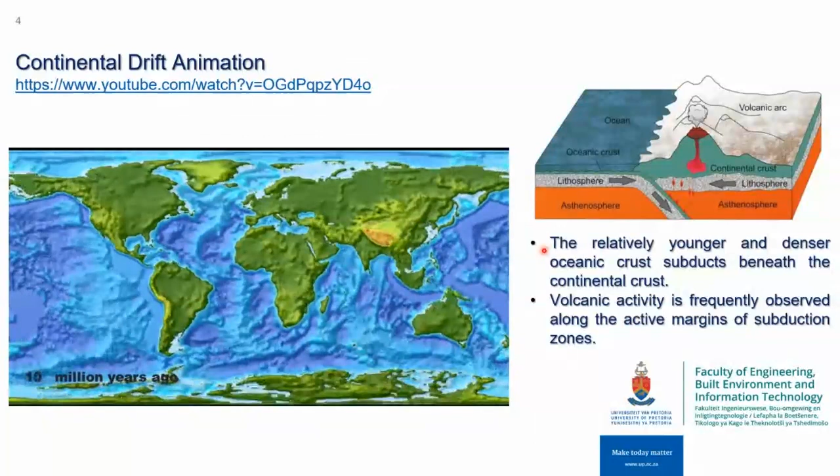So what are earthquakes and how do they occur? These are the major layers of the Earth. We have the lithosphere, composed of the crust and the upper solid mantle, and below that the mantle is very soft and has a relative motion, which causes the plates to deform, causing continental drift. As you can see in the animation, 200 million years ago Pangaea, a single continent, formed into the modern map. The interaction between these continents and tectonic plates causes earthquakes, and the movement of the tectonic plates increases the stresses at the boundaries. When these stresses reach a specific limit, we have the rupture.

The rupture at the focus causes an entire surface to move, generating P and S waves. This is how earthquake waves are generated and they reach us, so we feel the vibration and movement of the ground. The P waves reach us first, the S waves come later, and mainly these waves are the ones measured by accelerometers.

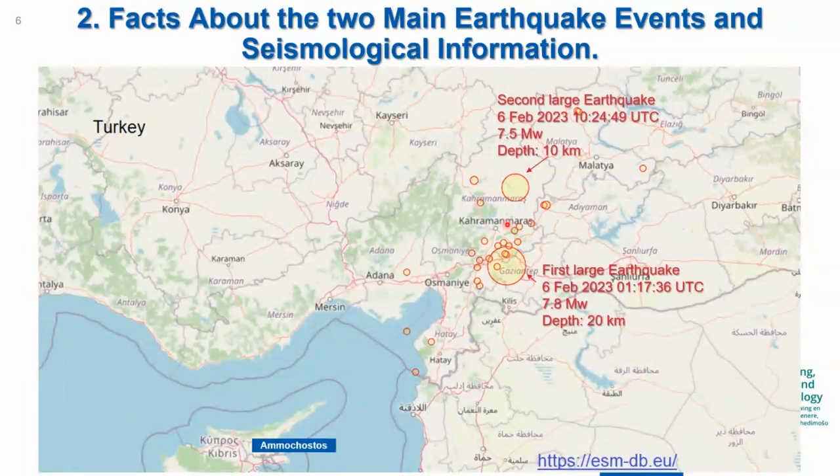Now, on the 6th of February 2023, in the morning at 17 minutes past 1, a 7.8 moment magnitude earthquake occurred in the region between Kahramanmaraş and Gaziantep. Nine hours later, another earthquake of 7.5 moment magnitude occurred in the region north of Kahramanmaraş. These events caused more than 3,500 aftershocks. This figure shows the epicenters of earthquakes larger than 4.5 moment magnitude.

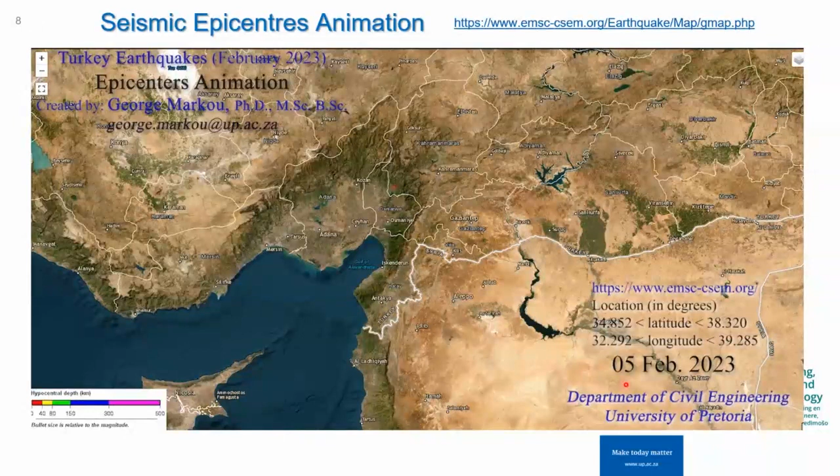As you will see in this video I created for this presentation, using EMSC website data, it shows the epicenters from the 5th of February until the 28th of February. The red dots show the 6th of February, 7th of February, and so on. More than 3,500 earthquakes occurred due to this phenomenon.

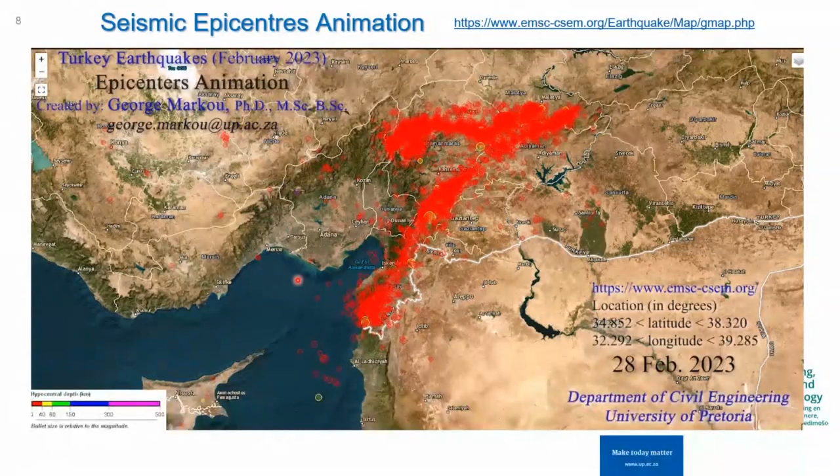Cyprus is nearby, and on the west side is Greece, countries that are extremely concerned with what happened. The seismic activity in these regions also activates other faults in the southern and western area, like in 1999, when we had an earthquake that also caused earthquakes in Cyprus and Greece.

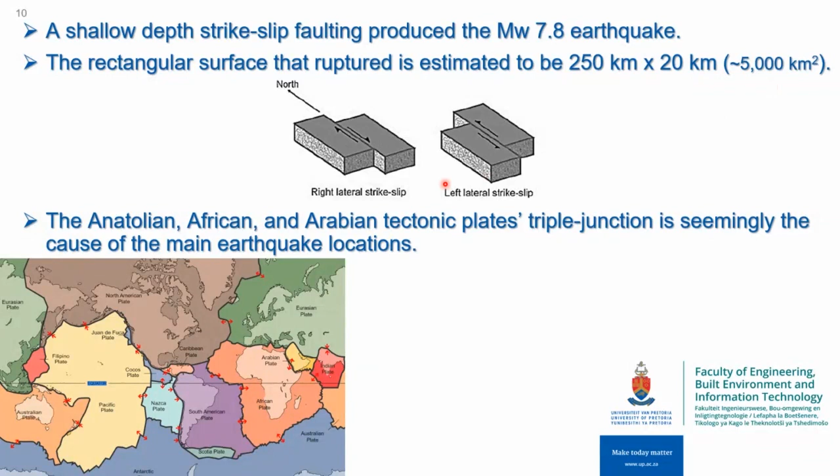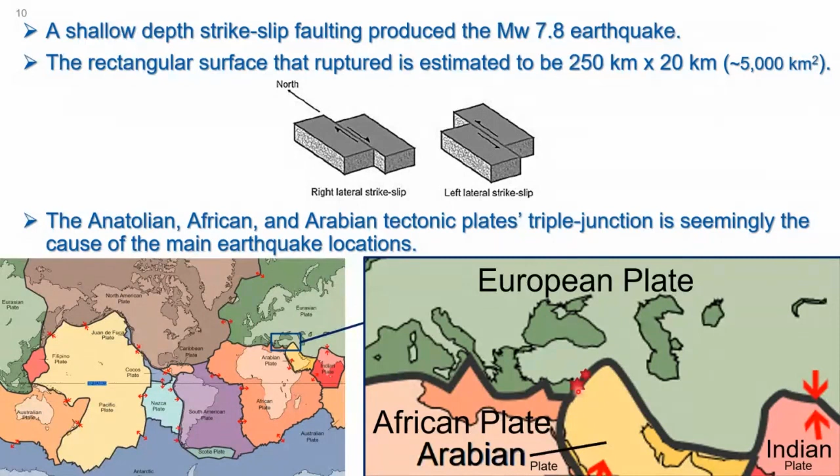In this case, we have the intercontinental plates, and this is where the earthquake occurred. It was a shallow depth strike slip faulting that produced a 7.8 moment magnitude, and the second one was 7.5, plus several 6 and 5 moment magnitude earthquakes. An estimation of 250 kilometers by 20 kilometers depth was the rectangular surface of the ruptured fault, around 5,000 square kilometers. This is attributed to the triple junction of the Anatolian, African, and Arabian tectonic plates. This is the eastern Anatolian fault, and this is where the two main events occurred.

Now, the accelerograms, and in this case the components of the accelerograms that I used, I got them from the Engineering Strong Motion database, from the station KHMN, which was located 25.5 kilometers from the epicenter. And of course, the epicenter is shown here again.

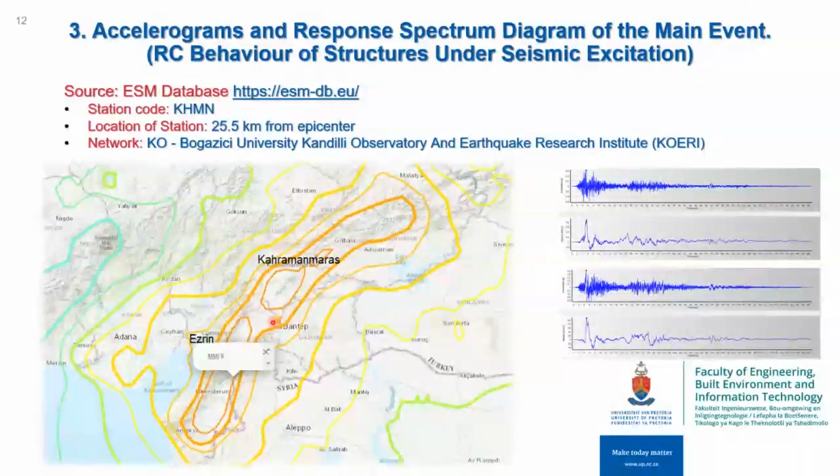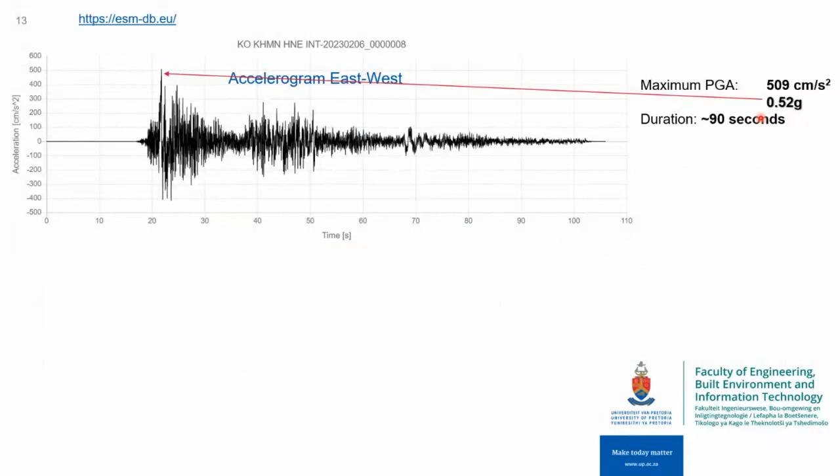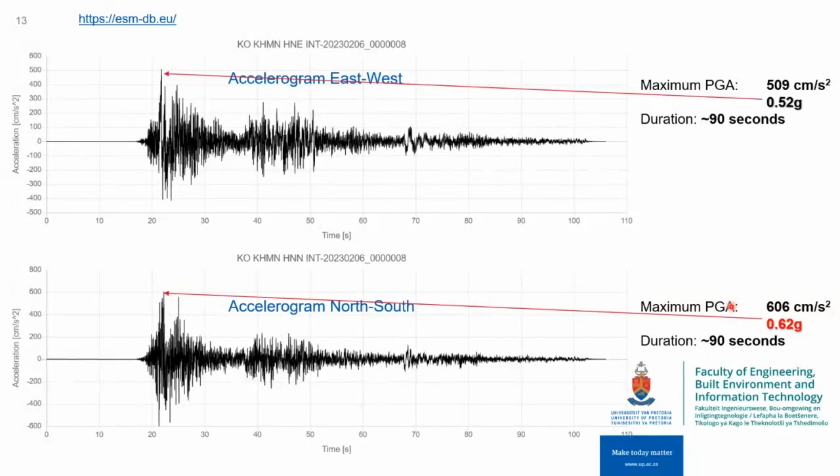The east-west accelerogram derives a maximum acceleration, peak ground acceleration, of 0.52 g, and the north-south component is 0.62 g. For those experienced with earthquake-resistant design, they know that our maximum peak ground acceleration here in South Africa and Pretoria is 0.2, and in Cyprus, which is an actively seismically active country, it's 0.25. So these are really large magnitudes, and the Z component also was very large, reaching almost 0.5 g.

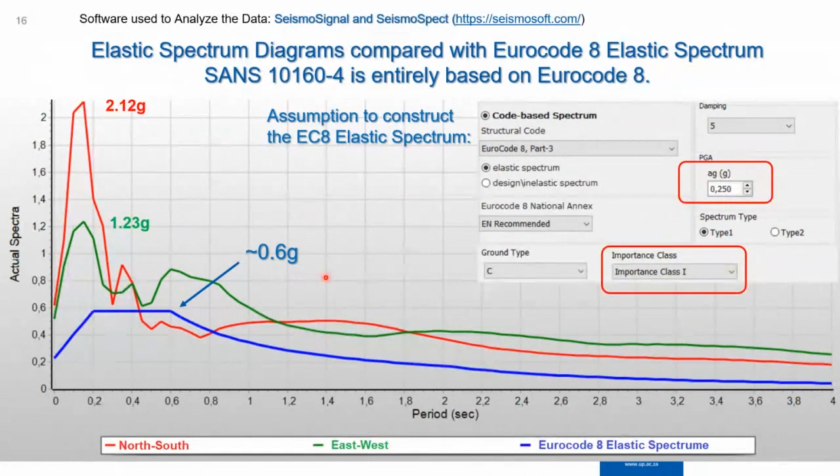Now, if you want to see where Eurocode 8 is located, I use 0.25 g as the peak ground acceleration, importance class 1, which are buildings of minor importance, and the ground type was C. This led to a maximum of 0.6 g in the elastic spectrum again. And if, let's say, we go to importance class 4, which are hospitals, fire stations, power plants, we can reach up to 1 g, again in the elastic spectrum diagram.

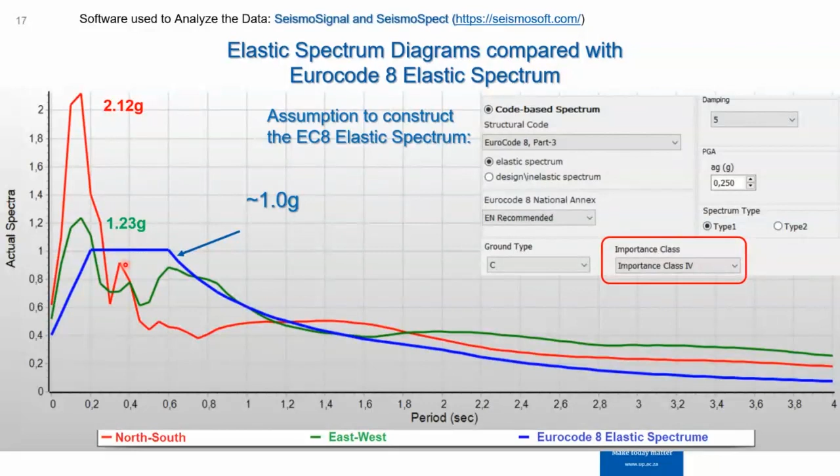What is the actual strength? Because we have all those safety factors integrated there. So back in the time, after I finished developing the first phase of ReConAn FEA, I said, all right, let us check what the Eurocode will provide to us.

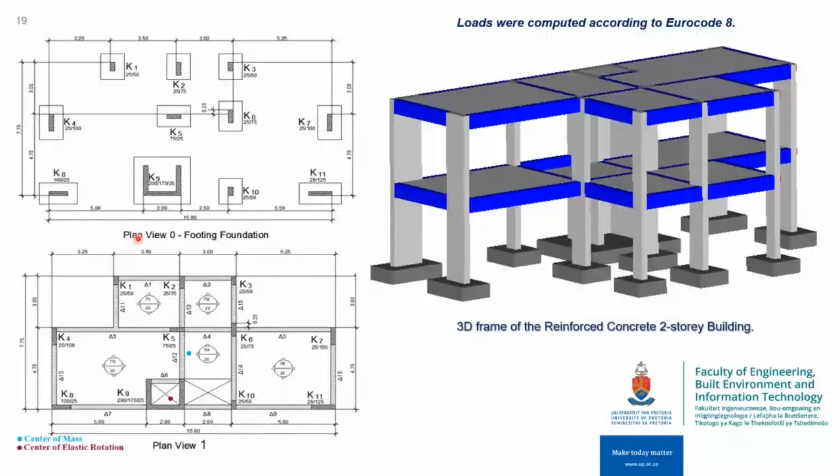So I designed a random structure, a 2-story reinforced concrete structure, which I used to design, as you can see here, this is a 3D frame as it was developed in the finite element analysis software. And then I used the geometry and Eurocode 8 in order to calculate the reinforcement using a commercial software.

So these are the reinforcements for the columns and the beams. They had stirrups 8 millimeter every 10 cm, and the longitudinal reinforcement were practically 2 to 3 bars, 14 milli in diameter, top and bottom. Some of them had 16 milli.

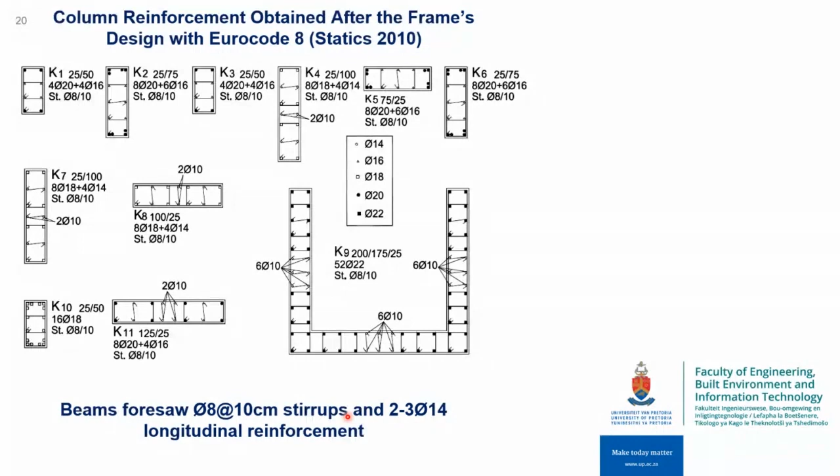So I created a 3D detail model, as you can see here in ReConAn FEA, with hexahedral elements to discretize the domain of concrete, and embedded rebar elements in order to discretize and model each and every rebar according to the design that derived from Eurocode 8.

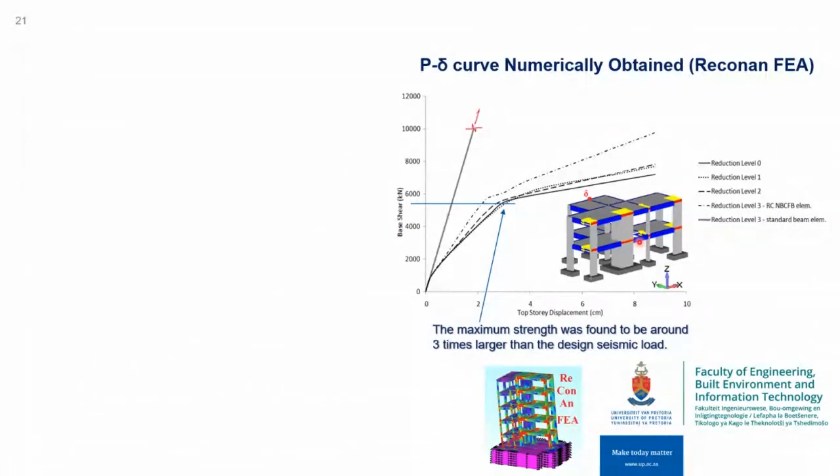I performed a pushover analysis, and what I discovered was that the actual load that I needed to apply in order to make this structure fail was 3 times larger than the actual design. So practically, between 2.5 and 3 times is the over-design that we get in the final product, if we assume that this is the earthquake that we expect to get.

So this shed a lot of light on why structures don't fail. They do develop damages, but they don't fail if we have very large earthquakes.

And of course, one of the main goals, as you can see, this is a model that I've developed of the Burj Khalifa, is to be able to perform full nonlinear dynamic analysis of structures like that in order to evaluate them. This model has more than 14 million hexahedral elements and more than 22 million nodes. And of course, this does not include piles and soil domain.

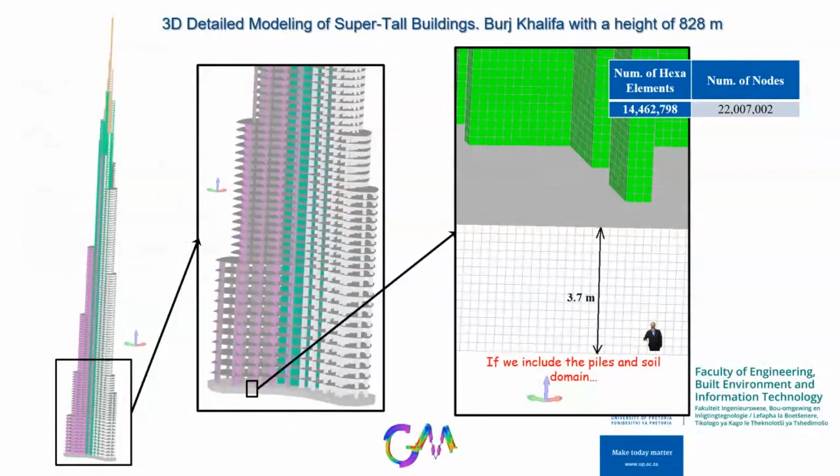Now that we established how far the technology has reached in terms of earthquake-resistant design, and we didn't even talk about modeling and experimenting with seismic isolation, one will wonder: okay, do we know how structures are expected to behave, even those structures that are not behaving in a ductile manner, that were not designed based on modern technology?

So I decided here to show you this experiment that was performed in the largest seismic table in the world, which is in Japan, E-Defense. And this research group, led by Prof. Kim, designed a normal reinforced concrete structure, which is 6 stories.

And in this case, they designed it with the old Japanese code. This experiment was in 2006. And they also incorporated flaws like a short column, and the design did not foresee for high ductility nor well-confined structural members.

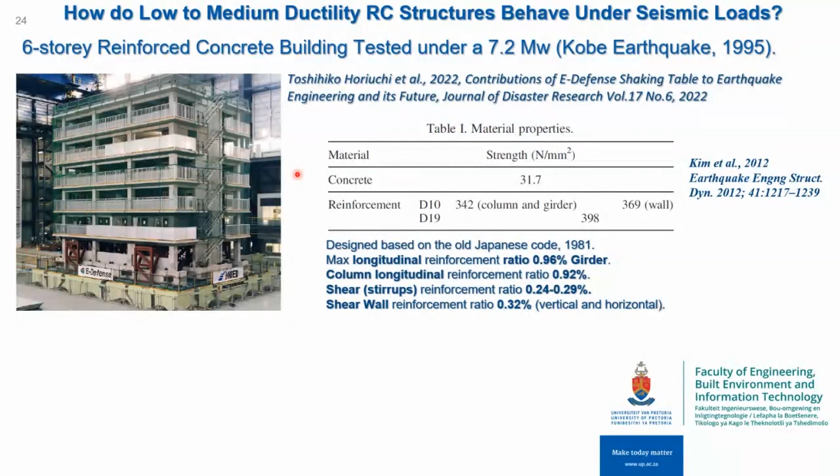They used less than 1% longitudinal reinforcement in girders, the same for the columns. The stirrups were merely 0.3%, and the shear walls included in this structure, for vertical and horizontal reinforcement, were 0.32%. And the material here, 30 megapascal, is something our students in the laboratory cannot achieve because they always get higher strengths, at least 50. So 30 megapascal for a 6-story building is not high strength, let's say.

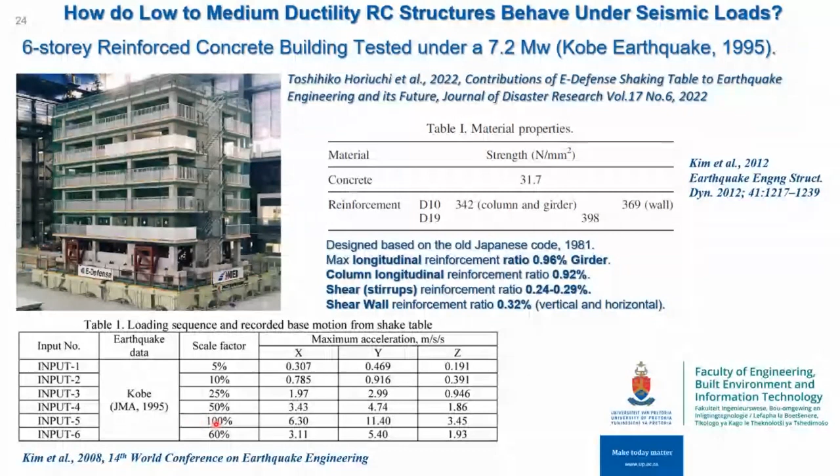So what they did, they applied 6 different earthquakes in order to investigate the mechanical response of this structure. The 5th was 100% of the Kobe earthquake, and the last one was 60%. This earthquake, in 1995, killed 6,434 people and caused more than $200 billion in damages.

As we can see here, this is the experiment, an overview at 100% of the earthquake. Now we are going to see the damages that occurred. This is a standard short column failure due to the development of significant shear stresses and strains. We should develop and perform designs that avoid that type of failure, but in that case they did it intentionally just to see how the structure would perform.

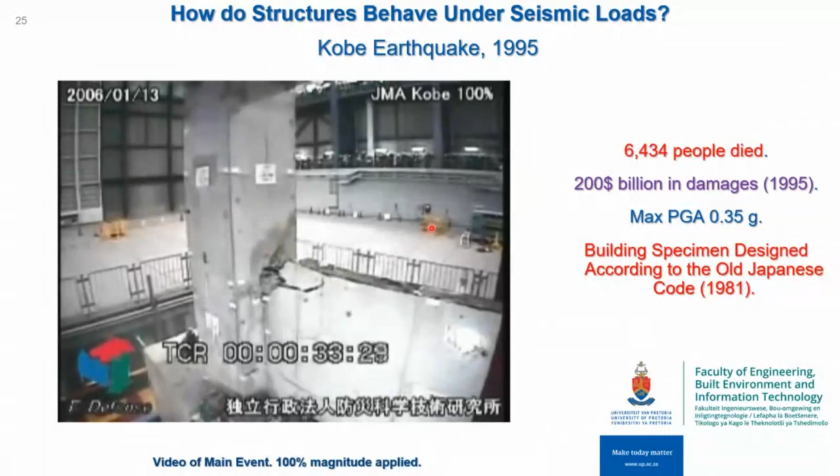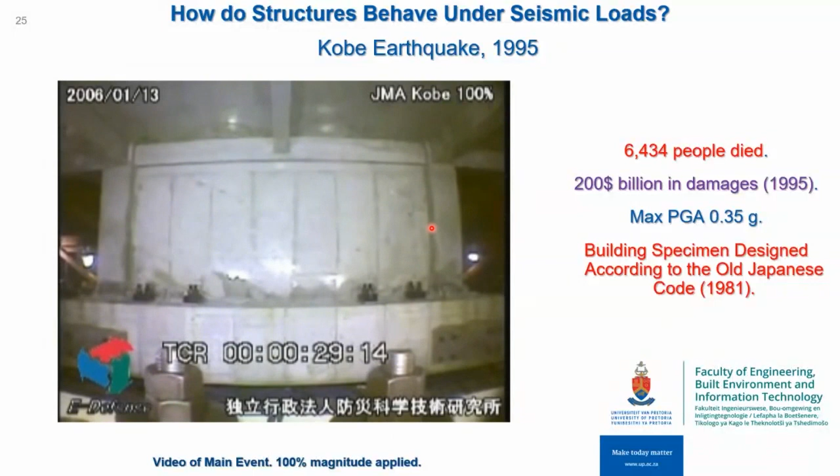Also, a corner column develops damage, and we all know that this should be avoided. You should decouple the reinforced concrete wall from the column. This is how, even a medium ductility shear wall, behaves under these seismic loads.

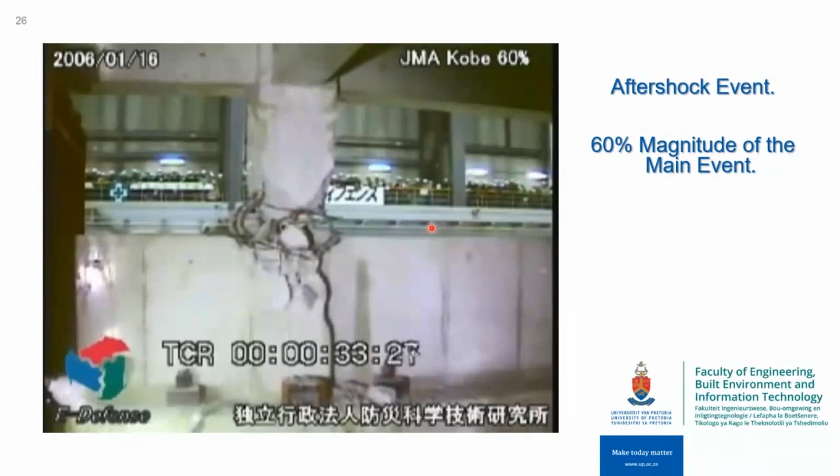Thereafter, they applied 60% of this earthquake. Now the column is already lost, and the framing system, already damaged, has to resist 60% of this relatively large earthquake. As you can see, the column is completely lost, but the remaining concrete, the drop beams, the shear walls are there to provide strength, and this structure did not fail completely nor collapse.

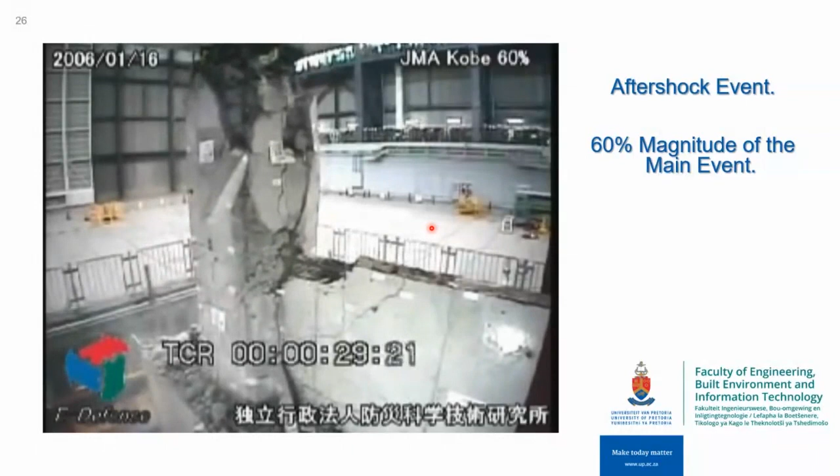As we can see here, extreme spalling occurs, but even without significant high confinement, the column maintains its integrity and is able to resist the superstructural loads. Some sliding is visible at the base, diagonal cracks are visible, but our shear wall is fine. So this is how reinforced concrete structures should usually behave, even though they are not designed to withstand significantly high earthquakes, and behave in a highly ductile manner. Ductility is the ability of a structure to deform beyond the first point of damage.

In 2000, the Japanese government and municipality approved the revised design code. On the 11th of March, the Tohoku earthquake occurred, a 9.1 moment magnitude earthquake that occurred approximately 75 kilometers out from Sendai.

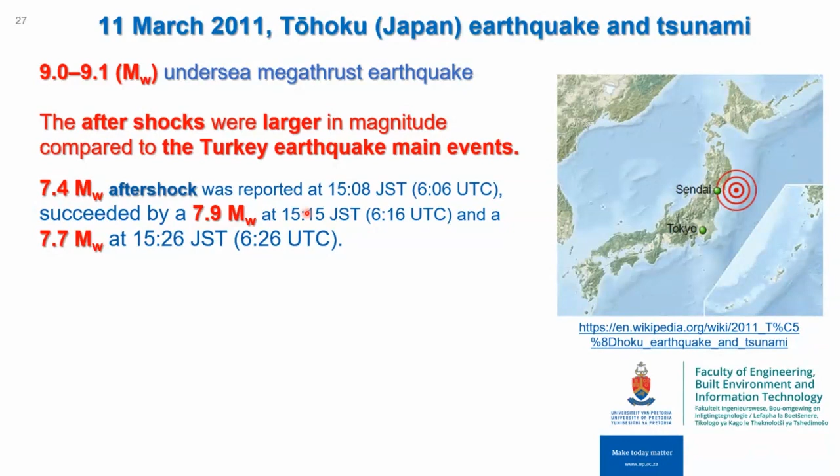The aftershocks of this earthquake were larger than the main events of the Turkey earthquakes: 7.4, 7.9, and 7.7 in just 20 minutes. These aftershocks are larger than the earthquakes in Turkey. And just for you to understand, the difference between an 8 and a 9 in moment magnitude releases 32 times more energy compared to an 8 moment magnitude. We're talking about a huge difference.

So what happened there? Buildings mainly collapsed and were destroyed due to the tsunami that followed, not due to this massive 9.1 earthquake plus the very large aftershocks, which shows that our codes work and we know how to design against earthquakes. Unfortunately, the tsunami killed a lot of people, almost 2,000 to 2,500 are still missing.

So now that we know how structures should behave, even structures that are not designed to be extremely and highly earthquake resistant, let's go see what happened in Turkey.

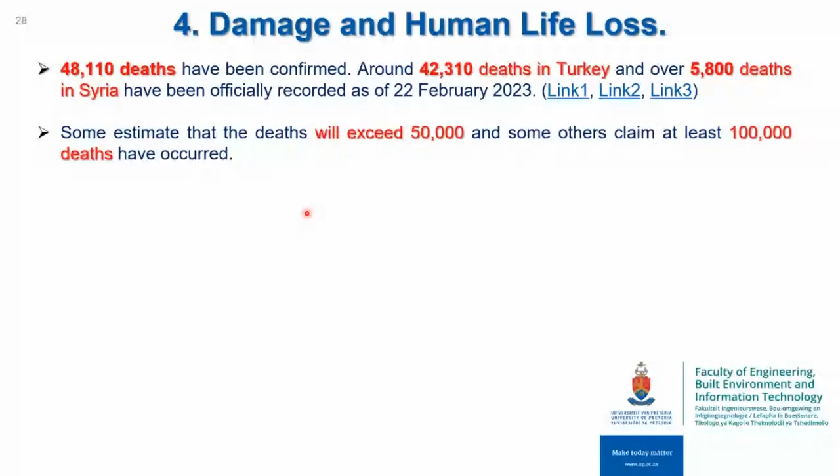Officially, 48,110 dead people were reported, most of them in Turkey, and I found this information in a report on the 22nd of February. Some estimate 50,000 dead, some others 100,000. A week or 10 days ago, I saw an interview on Greek TV of an analyst talking about 200,000 dead people. This is like 5 times more than the deadliest war in Turkey's recent history.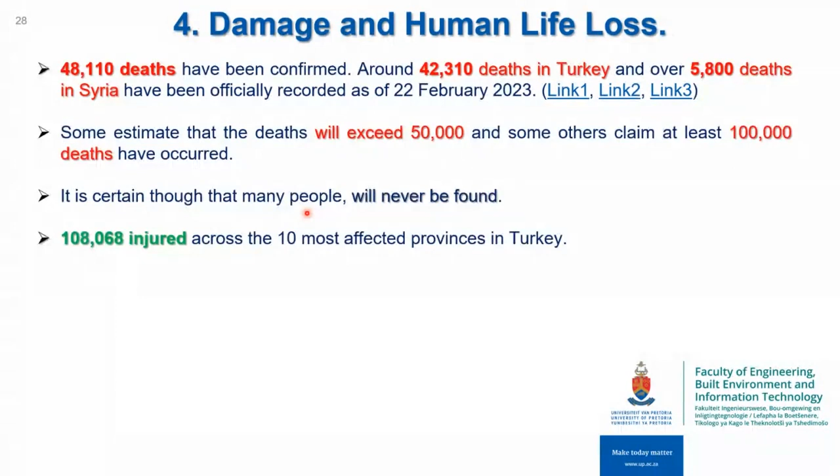It is certain that we will never know how many died, and a lot of people will never be found. More than 100,000 were injured. Another big problem was that this occurred during winter time, and as you can see, hypothermia and sub-freezing temperatures made it very difficult for people to get rescued.

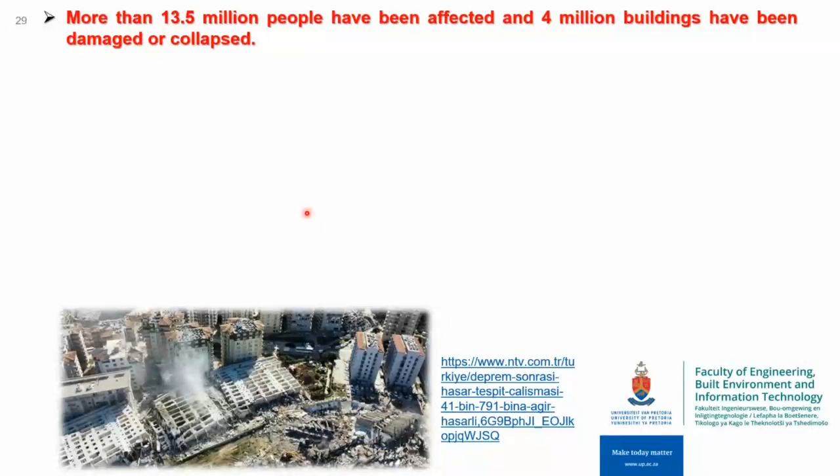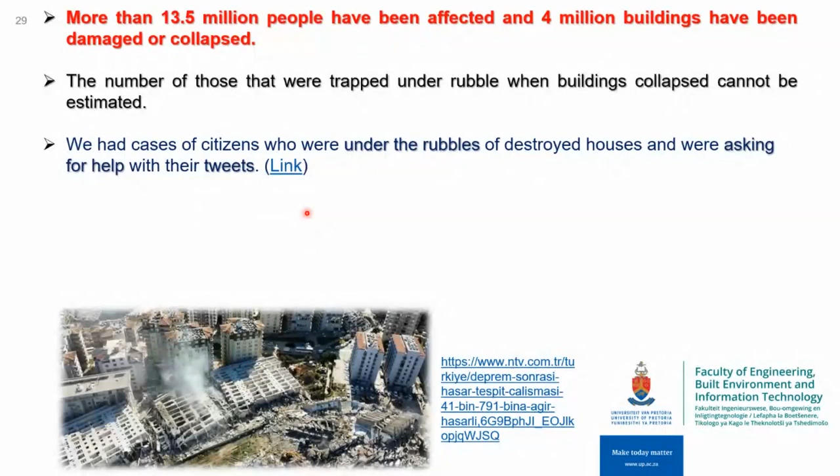On top of that, it's estimated around 13.5 million people have been affected, and 4 million buildings have been either damaged or collapsed, most of them damaged. The number of those trapped under the rubble cannot be estimated. In the first days of the incident, citizens were actually tweeting while being under the rubble, asking for help. That was a complete tragedy.

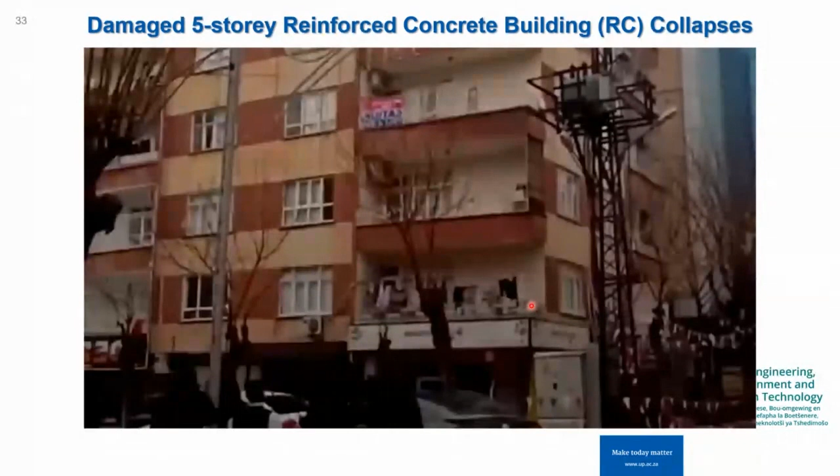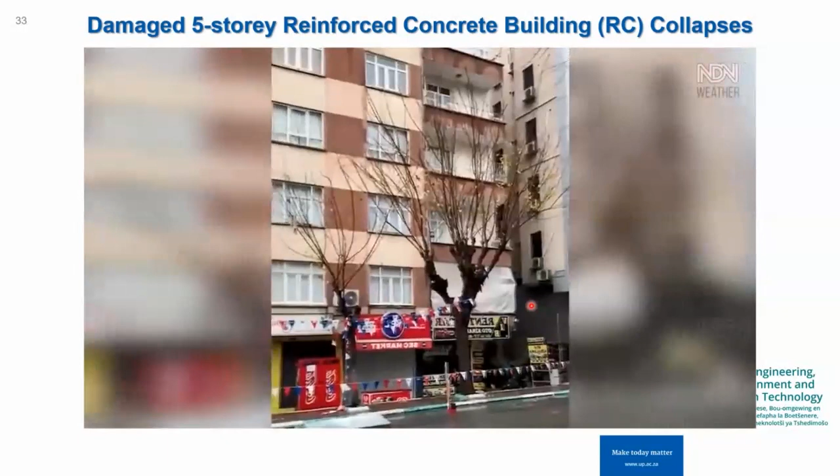So this is a damaged 5-story building on the 6th of Feb. And this is the failure. We will see the failure again from another angle. As you can notice, this is a vertical failure. This is like a demolition, which should say a lot.

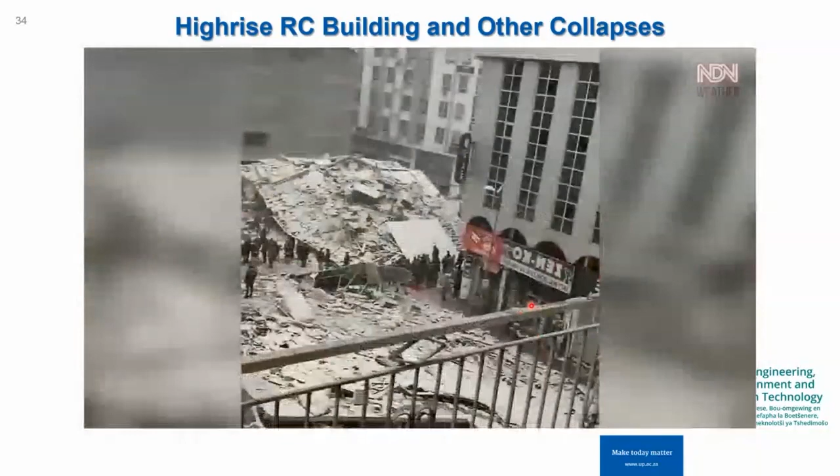Again, another video of people running left and right. This is a multi-story building that again failed completely in a vertical manner. No residual strength whatsoever, completely destroyed.

And as you can see here, some of the buildings partially collapsed. People were in the middle of the street, and wherever they were looking, they were experiencing vertical collapses, buildings collapsing in a vertical manner. This is again another case of a completely vertical failure. Makes no sense whatsoever. This is not how reinforced concrete buildings behave.

And of course, after all this experience, people didn't know if other buildings would collapse after the earthquakes had passed. As you can see here, these are buildings after the earthquake, and look at this - half of the multi-story building collapsed.

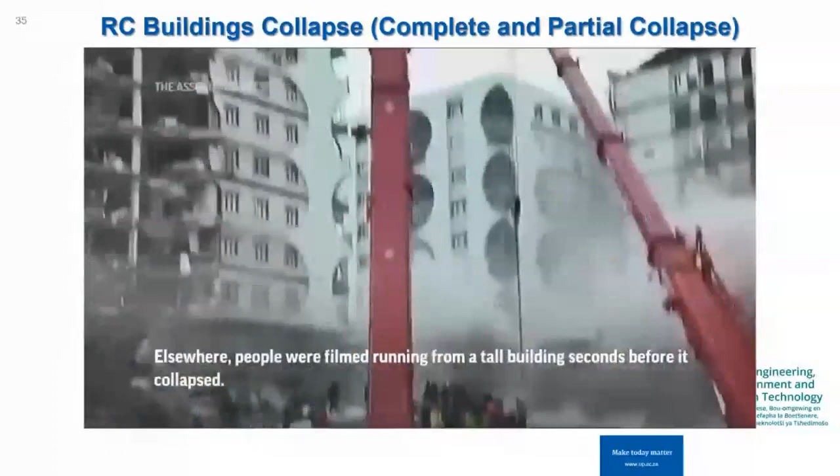So the camera will zoom in, and I will pause it for a bit. This is supposed to be a reinforced concrete building. This is supposed to be here. This is supposed to be a reinforced concrete slab. Do you see any rebars? Here, here - this is supposed to be a reinforced concrete column. Do you see any rebars? No rebars. Where is the reinforcement?

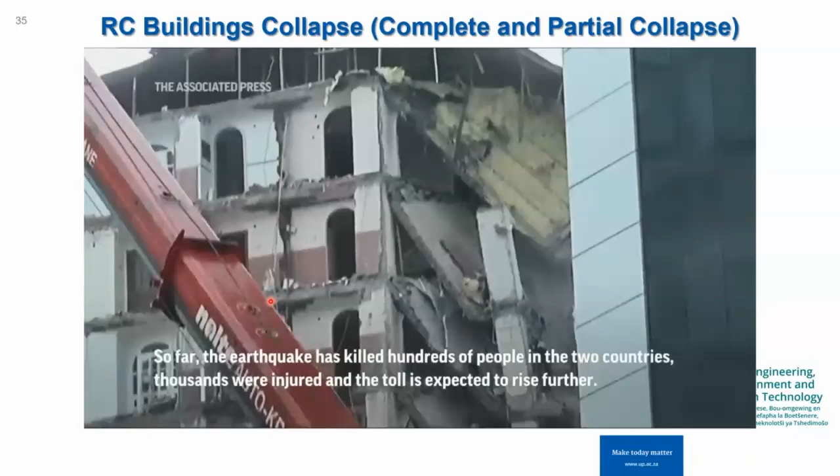So let's continue. This is Antakya, an entire neighborhood. As we can see here, we have 4 five-story buildings, right? Which are entirely destroyed, and some of them are still standing. This is southeastern Turkey.

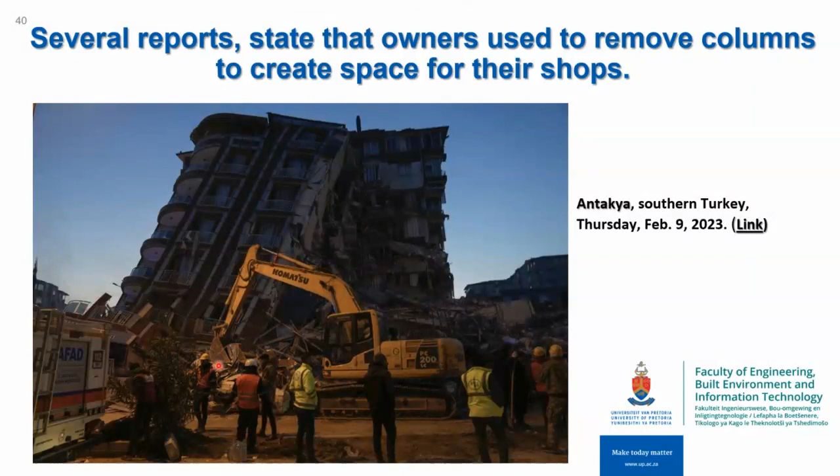Several reports also stated that owners of shops removed columns to create space for their shop. This is a case in Antakya, a multi-story reinforced concrete building which lost its ground floor and first floor. This soft story mechanism occurs either due to illegal interventions or due to bad design. We have a soft story, earthquake strikes, we lose that entire story - first floor becomes the ground floor, the second becomes the first, and so on. This is something that we know.

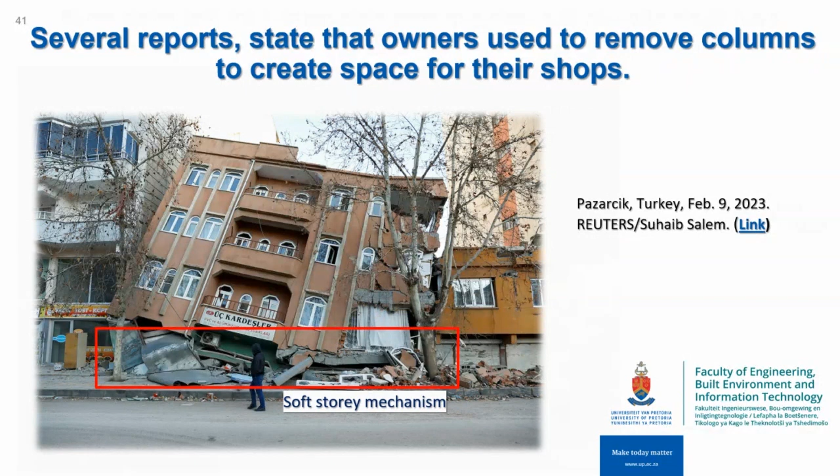Now, some claim - and I saw some colleagues, especially in Greece, who were interviewed by many journalists - said there was no way to save these structures, no code could have helped them. But we saw buildings failing vertically. This makes no sense - no, the earthquake was so strong that there was no salvation.

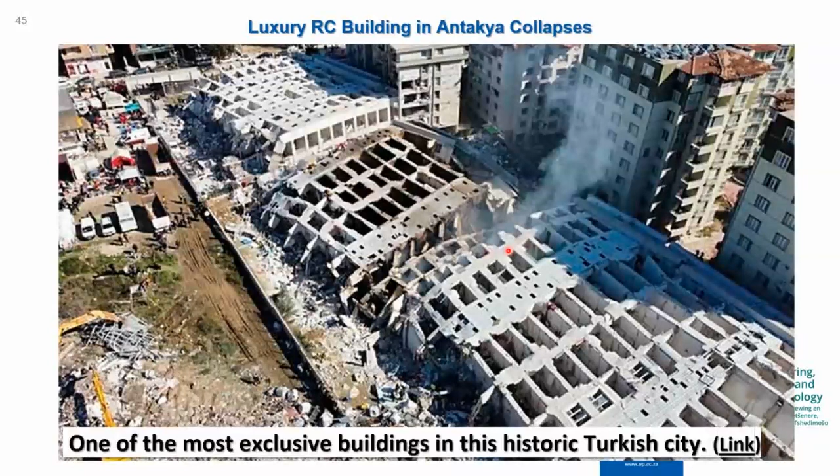But this building was completely destroyed. This was, here we can see a luxury reinforced concrete building in Antakya, which was also promoted as not only heaven on earth, but an earthquake-resistant structure that will offer a cheap solution for the housing problem that Turkey was facing.

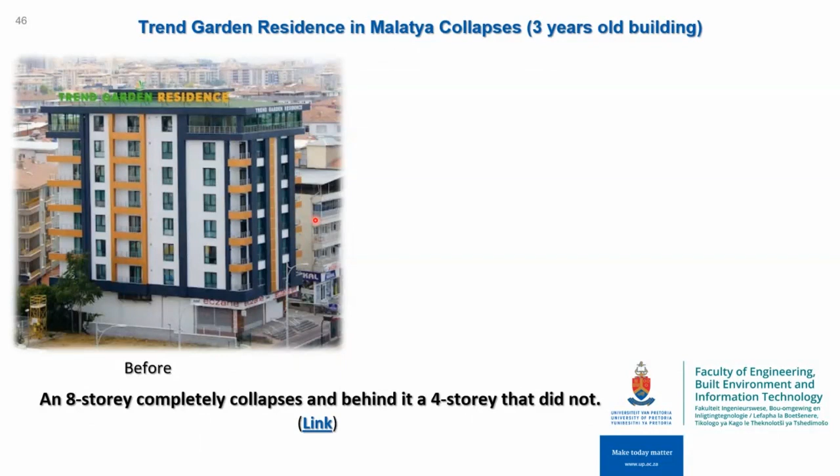So here we can see the Trend Garden Residence in Malatya, which is an 8-story reinforced concrete building. And behind it, we can see a 4-story reinforced concrete building. And after the earthquake, as you can see, this is the sign, and now this is the new position of the sign. And you can see the reinforced concrete building behind it, which is 4-story, that is still standing.

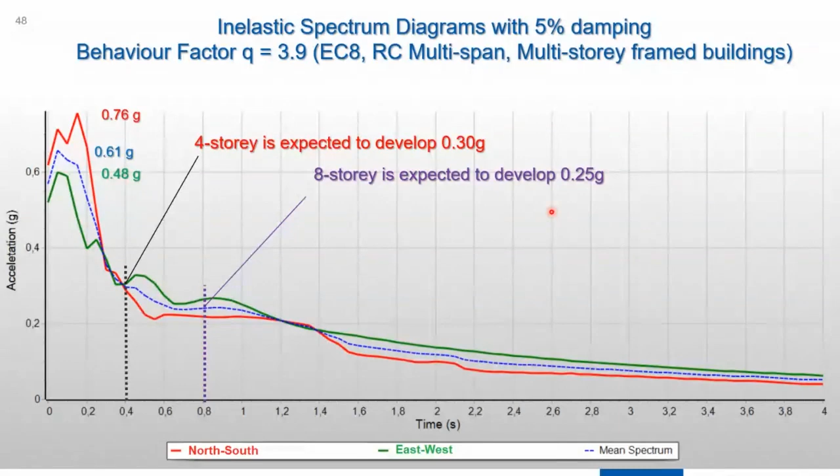Now, if we go to the inelastic spectrum diagram and see the exact same thing, we will get 0.3 and 0.25, roughly, right? So this means that the 4-story reinforced concrete building is expected to develop larger spectrum acceleration, so larger inertial forces relatively. So in that case, the 8-story building that was 3 years old, brand new, completely collapsed. And the 4-story that we've seen there, which looks like, I don't know, at least 10 years old, right? This is not very clear. Did not develop significant damages.

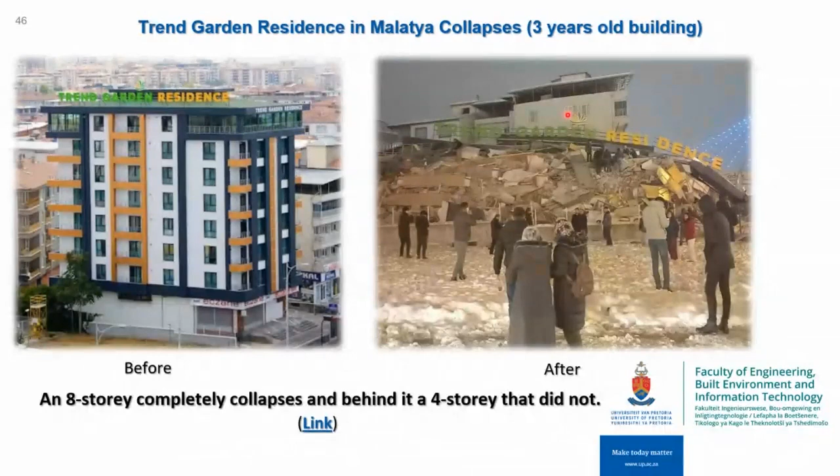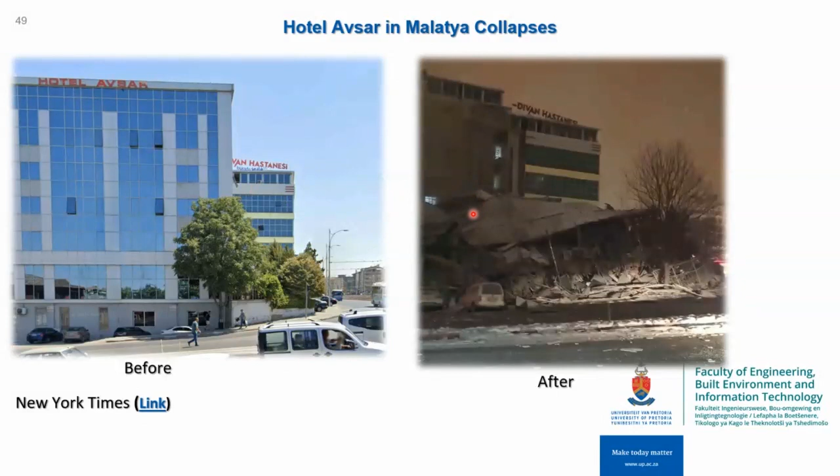Now here again, we have high, tall buildings. Again, why are they still standing? And this one became completely flat.

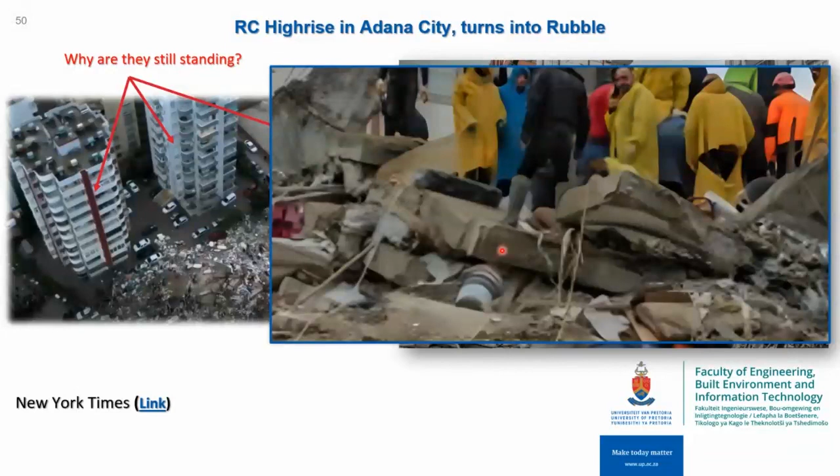Again, same thing, remember Adana, right? Very important, Adana. Again, somebody is looking for survivors. If we zoom in, for those that are familiar with earthquake resistant design of structures, this is not even the bare minimum. Again, if we zoom in here, which is what this was supposed to be, a structural member, reinforced concrete structural member, again, no stirrups at all, and these rebars, I mean, it's not even the bare minimum.

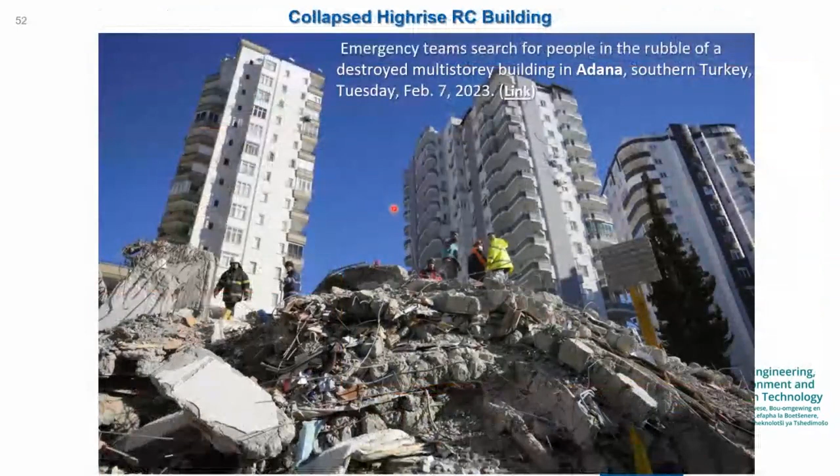This again in Adana, another multi-story structure, and if we zoom in here, you see, and we again apply an AI software to clean up the photo a bit. Look at this. This is the longitudinal reinforcement of what is supposed to be a 15-story building plus. A 15-story reinforced concrete building designed and constructed at a highly seismically active area has no reinforcement. This for us is no reinforcement.

So now I think it's pretty clear what my point is here from the videos that we've seen and from the pictures. I also wanted to show you here a few failures in different churches and mosques.

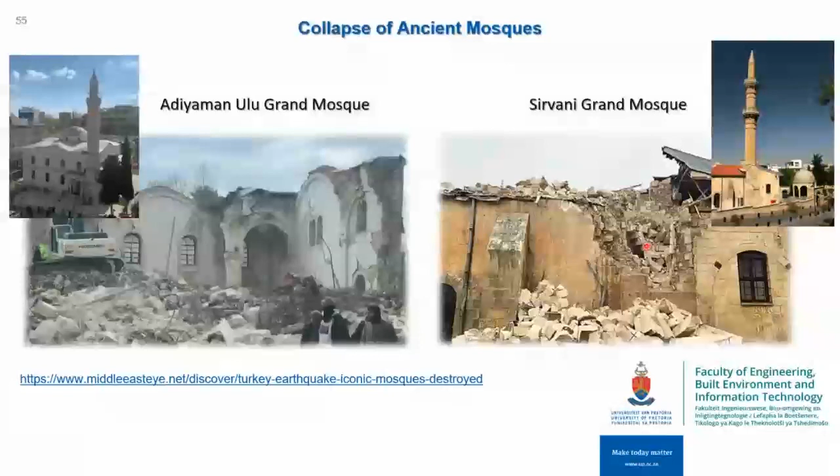This is the Adiyaman Ulu Grand Mosque, and this is the Sirvani Grand Mosque. And as you can see, before, after, and again, this is a complete disaster, not only a financial one, but a historical one.

Other types of failures occur due to soil, in this case soil liquefaction. As we can see, this construction didn't develop significant damages, though it developed a very large angle due to the rotation caused by liquefaction. So this means that the soil under the foundation, which as we can see here, the foundation is around 1.5 meters thick.

One good way to calculate the thickness, as a starting point, is to take all the thicknesses of the slabs above and add them together, and the summation is, in this case, a very good estimation. So 7 times 20 is 140. This means that the design was adequate.

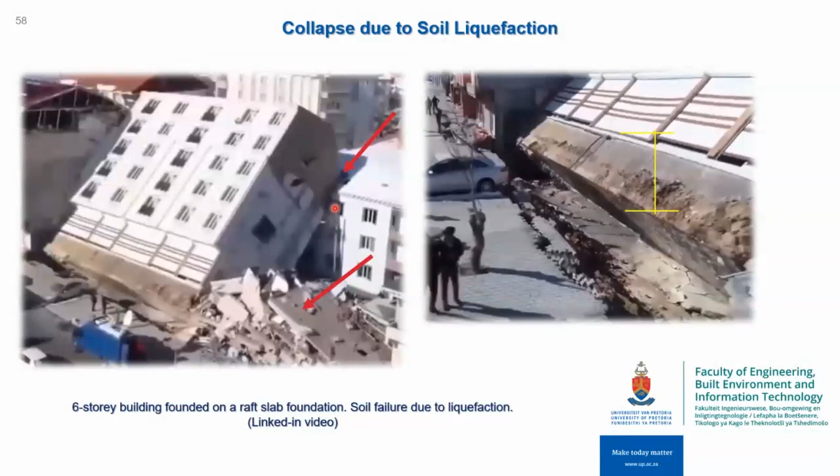But again, the geotechnical design was not performed, maybe at all, or they did not catch what happened during the Izmit earthquake in 1999. Many structures failed due to liquefaction, and in this case this is a standard case of liquefaction. By the way, this is what it looks like - part of the structure that actually completely collapsed, and the rest that tilted hit the structure behind, but it did not develop significant damages. So this means the superstructure was adequately designed, but the foundation system that was selected was not appropriate.

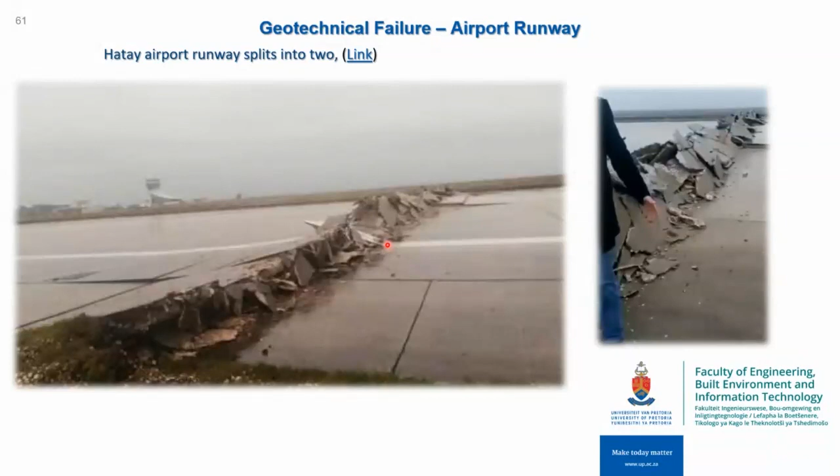This is a road in Turkey which was completely destroyed after the earthquake, and this is the damaged D420 road in Demirkopru. Also, this is the Hatay airport, where we see a corresponding geotechnical failure, and of course this runway is completely lost. It needs to be fixed. Nobody can use it. And I am sure there are many other cases, but we don't have an infinite amount of time.

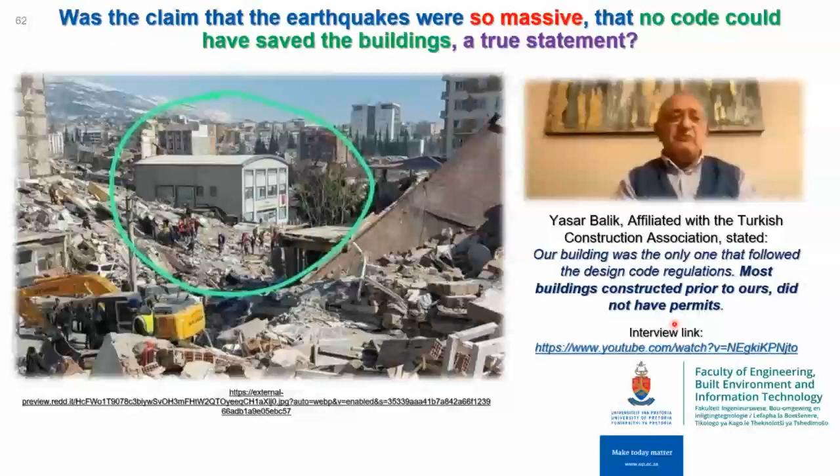Mr. Yasar - I saw this interview on a Greek channel, but I'm not sure if he's the president of the Turkish Construction Association or if he's affiliated. Some of my students from Turkey may be able to confirm this. He said that their building was the only one that followed the design code regulations, and most of the buildings constructed prior to theirs did not have permits. And of course, this picture depicts exactly what that means.

Now let's see what Mr. Erdogan was stating four years ago. This was March 2019. It's in Greek and Turkish, so I will translate it to you: 'With the zoning regulation and the building amnesties, we solved the problem of 144,556 citizens in Kahramanmaraş.'

So the government stated: you can pay us a fine and we will legalize your illegal structures. Here the Greek reporter says this haunts Mr. Erdogan now - they have elections really soon, they are down by 14 points, by the way, if you see international news. And they did it to attract people and get them to vote for them. So it says here, these are paper buildings.

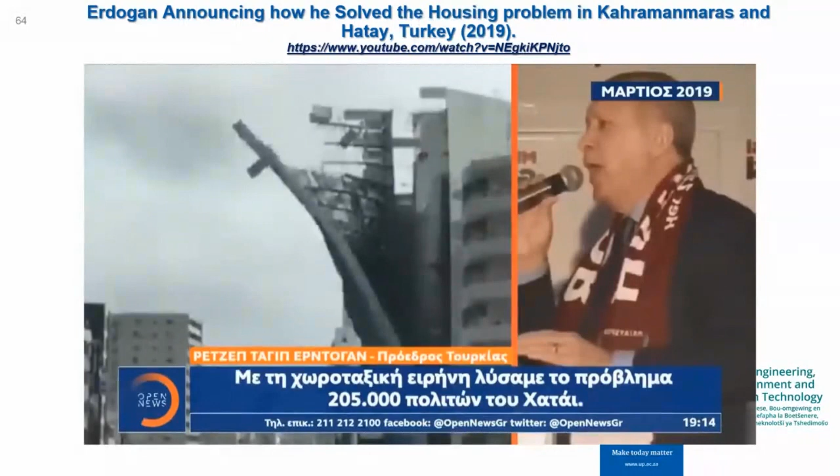With this zoning peace - so they were coming in peace with the owners that had illegal structures - with this zoning regulation peace, the problems of 205,000 citizens of Hatay were solved. So this is what he stated back then.

And not only that, now you'll see some more failures. They created advertisements on TV. Now I'll show you one of those right now.

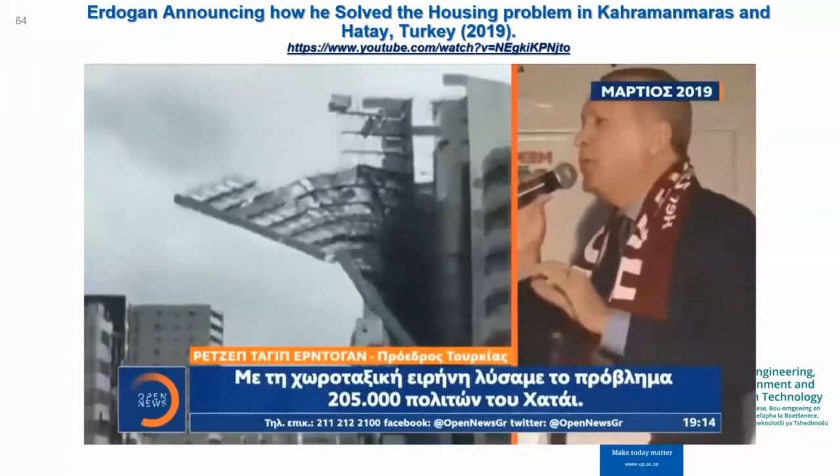So, unfortunately, this was the situation, and you can now understand from the numbers of how many building amnesties they offered to people why we had this huge number of deaths and collapses.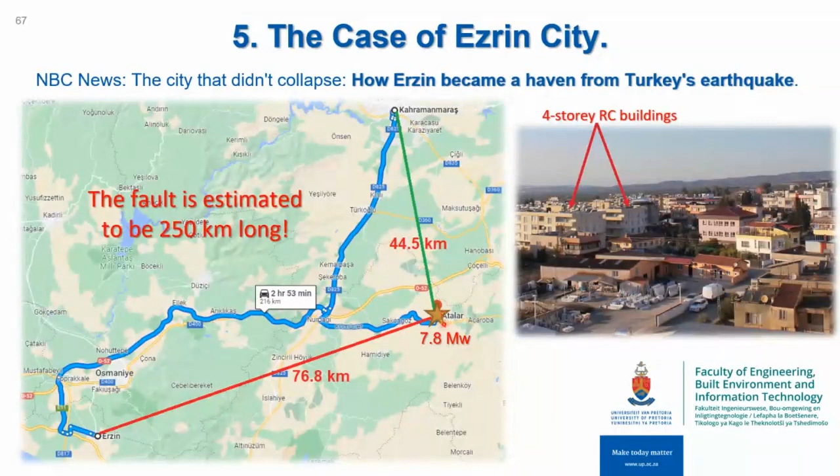Of course, don't forget that the fault was 250 kilometers long. So if I want to draw it here, I won't be able to do it because that's not 250 kilometers, right? So now let's see why people spoke about a miracle.

This is Ezrin, where the arrow shows the location of Ezrin city. Do you remember I told you to memorize some names? Adana. This is the epicenter over here. Ezrin is closer to the epicenter than Adana, actually half the distance. As the waves travel, the intensity decreases.

Malatya, way further. Hatay, also further. And what happened in Ezrin city? In this city, the officials and the residents stated that there were no deaths and no building collapses.

And of course, when they were asked why, they said that we did not allow any illegal constructions to be constructed, and after they located and found an illegal structure, they would actually demolish it. So NBC News interviewed Mr. Emre.

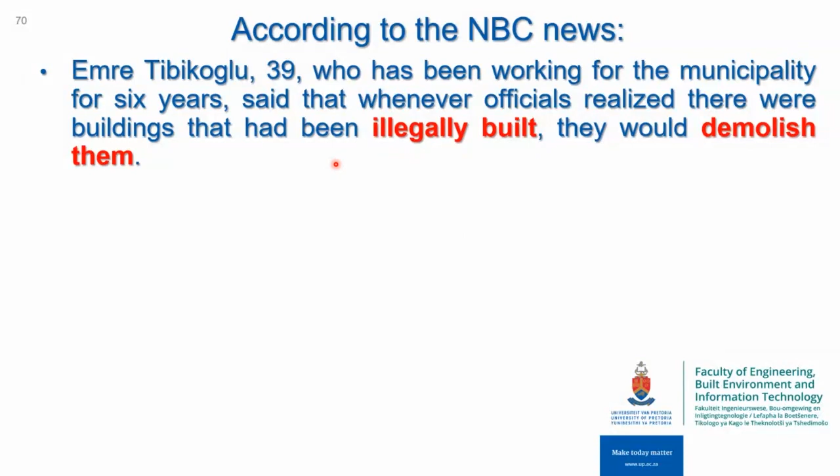He had been 6 years working for the municipality, and he said that whenever the officials realized that there were buildings that had been illegally built, they would demolish them.

And of course, we all understand that people were living in them, and those people were really mad about it. But the mayor held firm, and he proceeded with the demolition.

And after the earthquake, the city's population increased by 50% because a lot of people went there to find refuge as well. And of course, it's logical to understand the before and after in this case, which is what we need to see. Now with this, we reach the point of the conclusions.

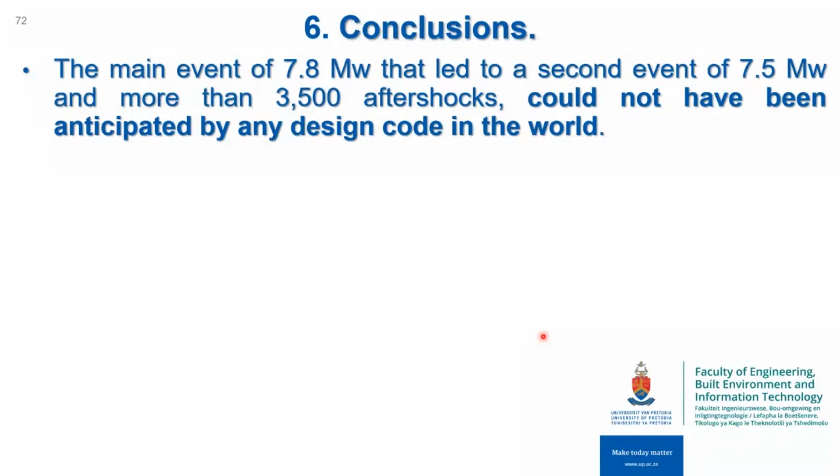So the first conclusion is that indeed, these earthquakes were large. And our design codes do not take into account the intensity that these earthquakes eventually produced, especially 2 main events within 9 hours between them.

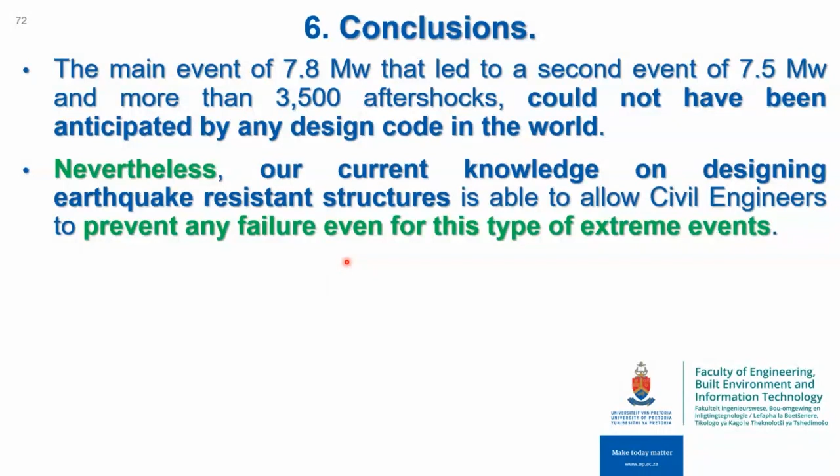Nevertheless, as we've demonstrated, and as we've seen from a lot of pictures and videos, the knowledge that we have today to design earthquake resistant structures can and would have allowed us to prevent any failure, even for this type of earthquake.

The reason why this did not happen, and we had a complete disaster, is mainly attributed to the building amnesties that the government was giving, contractors that did not comply with the country's code, and of course, poor quality construction material.

Concrete that behaves literally like sugar, like sand. And of course, in other cases, we had inadequate know-how and lack of fundamental earthquake resistant design knowledge from the civil engineers that designed their structures.

Could this have been avoided? The answer is yes, simply by implementing the design codes of the country properly. And of course, nobody says nothing would have collapsed, but definitely this level of disaster would have been avoided by at least 90%.

Was the city of Ezrin really a miracle? I'm sorry to say to those that believe and are really religious, it was not a miracle. What was a miracle, at least to my understanding, was that we had a non-corrupted politician, the mayor. That was a miracle, and this is what saved them. And that's why the city of Ezrin now knows who's going to be the next mayor.

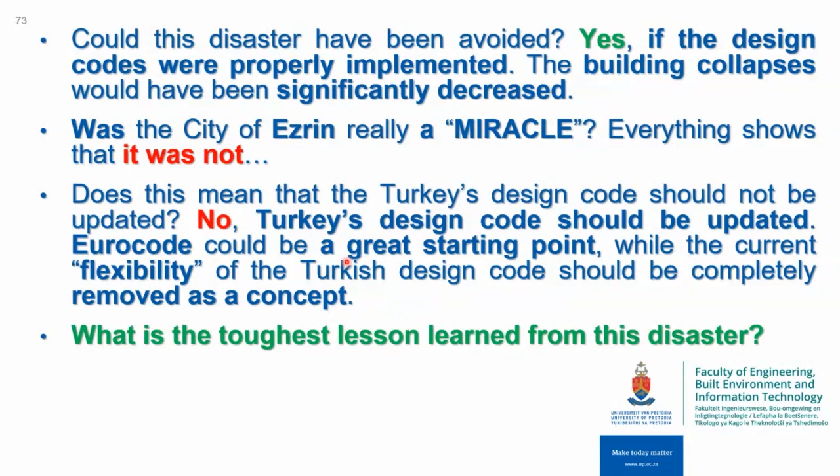Last but not least, unfortunately we do learn, especially in civil engineering, from this type of disasters, which as academics and civil engineers we would like to avoid by any means, but they do happen, as we can see, because we cannot control the built environment. And therefore, according to what I've seen thus far, the toughest lesson learned today is that corruption kills.

Now, this is not only a common English proverb, it's also the title of a publication on Nature Journal by Nicholas and Roger in 2011. On the anniversary of the Haiti earthquake, the devastating earthquake that killed hundreds of thousands of people, they discovered that 83% of all deaths from building collapse in earthquakes occurred in countries that are anomalously corrupt. So it's not only a theory, it's also mathematically proven.

Thank you very much.

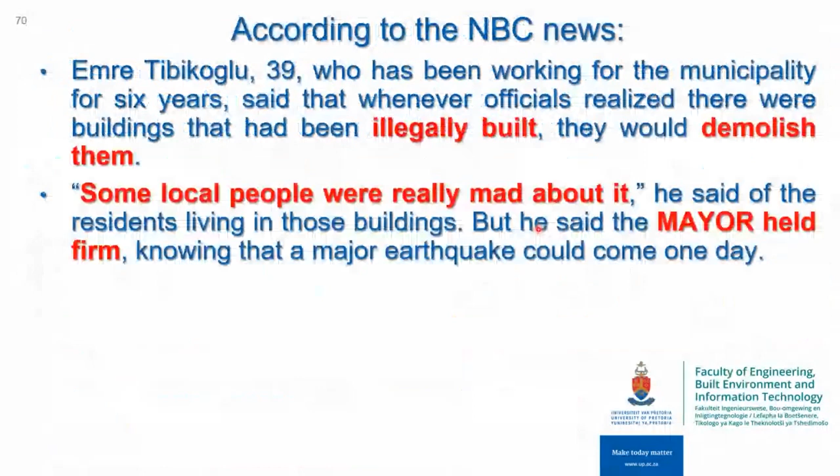Thank you, yes. Saurabh asks, can you quickly revise? I'm just putting my sound on so they can hear you. I'm muted, yes? Can you revise that spectral acceleration slide with the 4-story and 8-story comparison? Of course, that's the essence of understanding how things work. Can you see it, by the way? I mean online, can they see it online? I shared it, it's there, right?

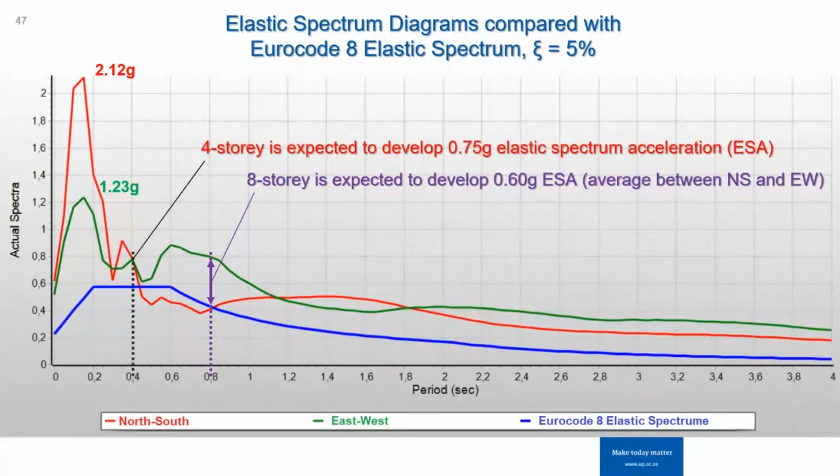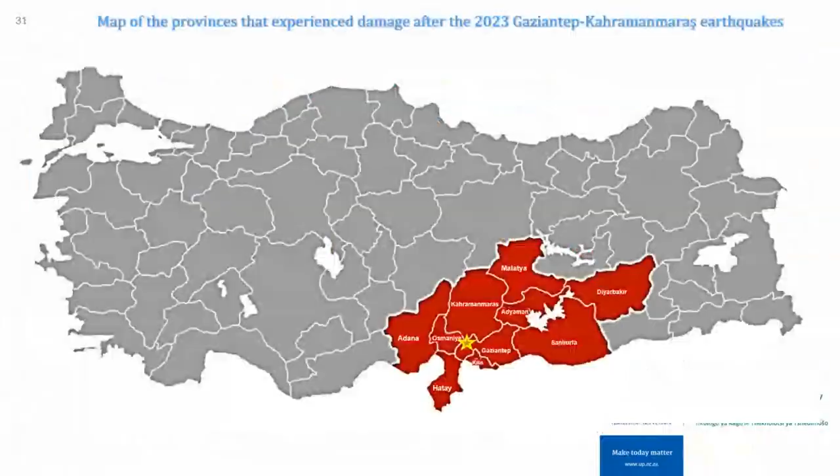The only way to do it properly is by using technologies that allow us to investigate the exact expected mechanical response of our structures, which in this case is detailed 3D modeling through finite element analysis. And in the future, I promise you, I joke you not, through AI. This is the best tool we currently have for evaluating the interventions we actually perform on our structures.

The other way is to construct and perform an experiment in the laboratory. I don't think a 1 million euro or US dollar experiment is something we can easily perform, and it has its limitations. A 6-story reinforced concrete building was one of the largest specimens ever developed and tested under dynamic loading, because you need a bigger seismic table to accommodate a bigger structure. Cost-effective wise, it's useless, there's no merit there eventually, because the cost will be so high.

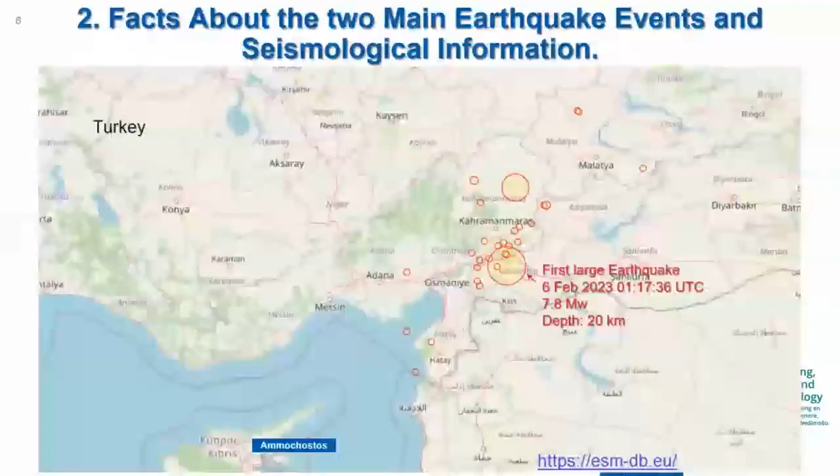There's a hand from Dima, perhaps she was my former student. Yes, Dima, in the UAE. Where are you, how are you? I'm good, doctor. I just want to say it's a pleasure to attend another one of your intelligent lectures. Thank you very much for all the information you shared with us. I'm always glad to attend your lectures, so thank you for this opportunity, doctor. Thank you again, you're most welcome. You make me blush now.

Okay, is there any other question, other than nice words? There's a question.

Is it better to have more redundancy in your structure, or to design with higher strength concrete when building earthquake-resistant structures? This is a very interesting question. Anyone involved in earthquake-resistant design plus soil-structure interaction knows this shouldn't be a simple question, because you need to dynamically choose the appropriate framing system and material according to the geometry of your structure, the foundation system, and the mechanical properties of the soil your structure is founded on. It's a multi-parameter problem. If you construct a high-strength concrete structure with a given geometry, and another with lower strength concrete, the high-strength one is more rigid. If an earthquake strikes with high frequency and resonates with the rigid structure, it may develop more damage and even collapse, while the other structure feels nothing or develops significantly less damage. So there isn't a secret recipe - there are rules you implement to end up with a structure that satisfies what Eurocode requires, mitigating risks as much as possible when an earthquake occurs. I hope that makes sense.